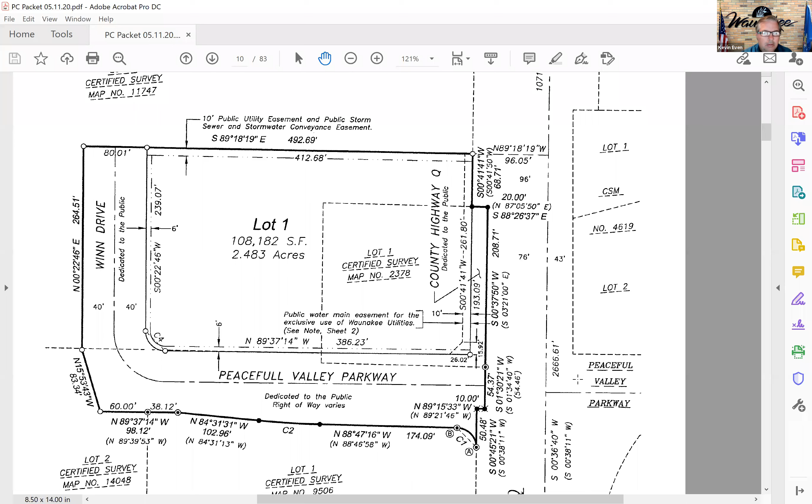So with that, Chris, I would recommend that you hold the public hearing.

Okay, then I'm going to open up the public hearing. If you would like to make a comment on this, please raise your hand and Tracy or Todd will pull you in. So there are two attendees participating. Bottom of the screen is an attendee. You have a raise hand button. If you care to participate, click that now.

I see a panelist with a hand raised. Looks like that's the applicant, Mike Lawton. But I don't see anybody as an attendee with a hand raised, Chris. Okay, raise your hand now or forever hold your peace. Well, I think Mike probably wants to talk as part of the public hearing. Okay, let's pull Mike in then. He's already in. Go ahead, Mike. You just have to unmute.

Unmute. All right, can you hear me now? Yes. Okay, I sound like that soap commercial.

A couple things. Brad Fry is on here from Kwik Trip, so he may want to comment on some aspects of this. And Don, I think I saw him on the list of participants, so he may want to comment as well. The one thing I wanted to comment on was the covenants.

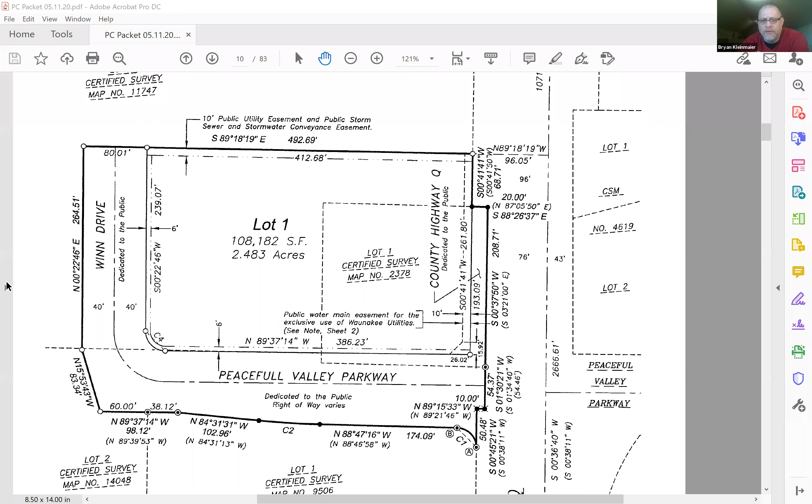Bryan explained that per page 5 of the packet, there are two separate recommended motions: one for the certified survey map, and one for the rezoning. There's no concern with the certified survey map comments from the public hearing, so that motion can be made as written. For the rezoning, if the requested condition should be added, it would read: subject to final review and approval by the village engineer and village attorney.

I'll make the first motion to recommend to the village board and joint plan commission that it approve the certified survey map, subject to final review and approval of the village engineer and incorporation of all village staff comments.

Do we have a second? Brad Zeman seconds. Does anyone want to make a comment? If so, please raise your hand. Otherwise, roll call vote, Tracy.

Chris Zellner, yes. Phil Willems, yes. Kristen Runge, yes. Brad Zeman, yes. Brian Malish, yes. Chris Thomas, yes.

Brian Wallace, yes. Okay, then do we have a motion for the second motion?

Please read it from page 5, the second motion, as Bryan indicated. I'll make a motion to recommend to the village board and joint plan commission that it rezone the lot to be purchased by Kwik Trip from A1 Agricultural Holding District to the C1 General Commercial District, with the attached deed restrictions to be recorded on the lot.

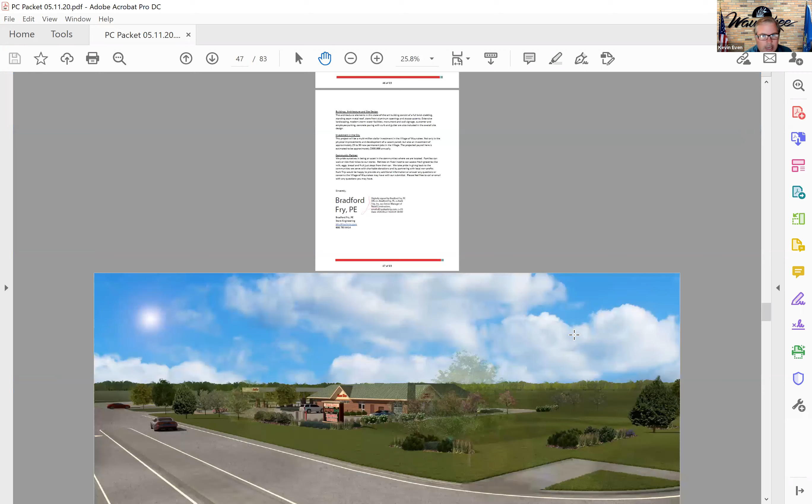I can start and Bryan can add in. This is the site plan approval, and Tracy will bring it up on the shared screen. Don Tierney wanted to add a couple of comments, and we should ask the applicant if they're interested in making a presentation regarding the proposed site plan. We have comments on issues worked out regarding the building's architecture, as well as some trail improvements to discuss. Chris, I think our first question is to ask if the applicant, Don or the folks from Kwik Trip, are interested in making opening remarks.

Okay, let's start with Don. Don, do you have any opening remarks you'd like to make? Yes, I do. Can you hear me? Yes. I'll tell you one thing, if I didn't have Jerry running this phone, I'd be in big trouble.

Is there any way, Kevin, you could put up those pictures I sent you of the shelters? That's the reason we wanted that flat roof on the canopy. We plan on having a beautiful park that overlooks this.

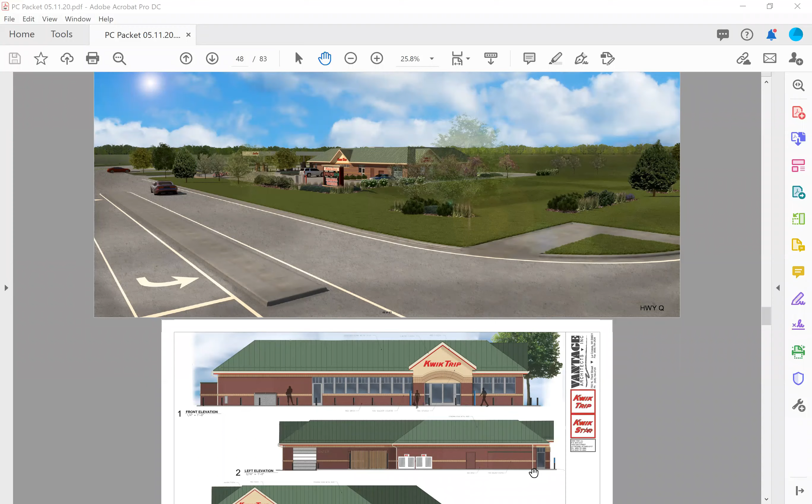Got it. Chris, I'm just wondering, just for flow of... okay, forget it. Go ahead. Yes, it's up.

Okay, what you're looking at is a picture of a pair of trusses being built in my shop. They're small; one is for the pickleball court in Kilkenny, and the other is for the beautiful West Bridge in Central Park. This is the same look we want overlooking the background of the Kwik Trip, and that's why we really appreciate being able to go with a flat canopy, because at a distance, that is what we want to look at. The other thing, on the north-south road, that would be the road on the westerly part of the site plan.

That will head straight north, and we really would have had to only put a 70-foot right-of-way. As we went, I wanted to go with 80, so we could have a beautiful walkway with terrace trees, so the kids coming across and down Woodland Drive could walk up a beautiful walkway.

And come up that walkway, and that would be their way to the park. As we plan the rest of this community, we'd have a walkway on the central spine that eventually would head west. I don't know, Kevin, could you bring that picture up?

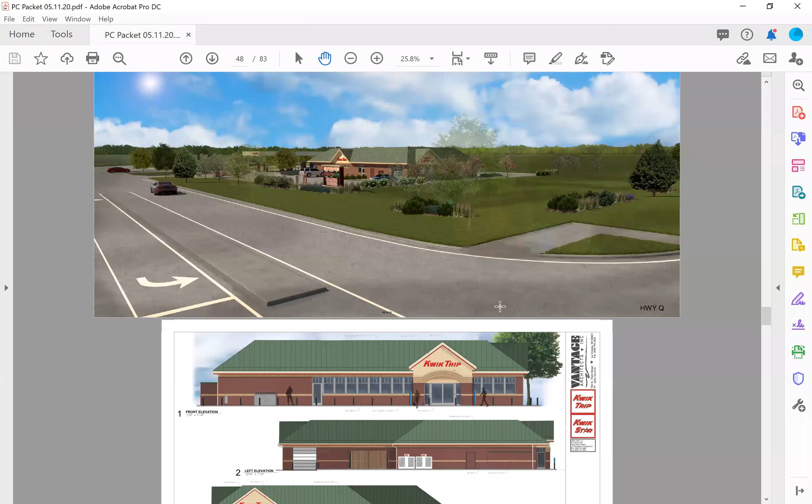Yes, this is Brad Fry with Kwik Trip. Again, I thank the village staff for the time we spent in March and April working through a couple of issues we had to improve landscaping layout and circulation through the site with driveway improvement, working hard to make this a special building and architectural plan for the village of Waunakee.

As you can see, this is looking northwesterly from the intersection. Some of the landscaping trees have been lightened in color to see more of the building features. The canopy here, like Don mentioned, is a flat roof canopy. We did a 9-foot brick and a tan colored fascia.

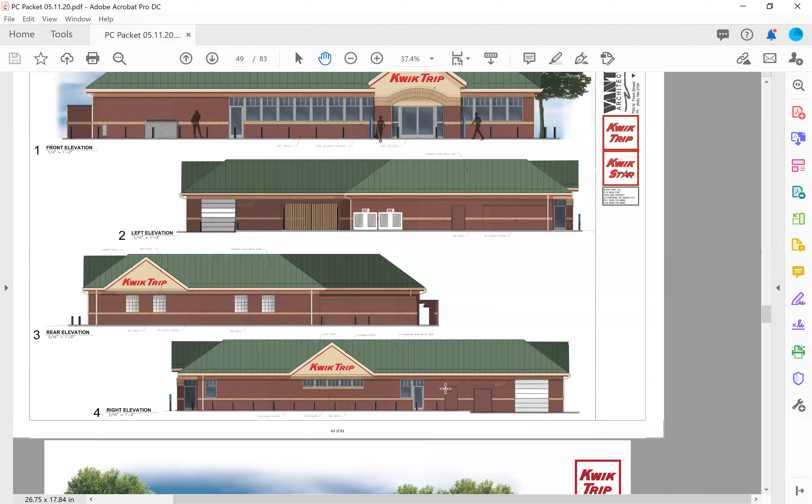We did remove our stripe that goes through the canopy, again just to not raise as much attention to the canopy as we typically do.

And then again, this still stays with our overall franchise colors and franchise look on the building, with the 2-tone brick, the green hip roof, and the tan fascia and gutter line. And that's all I would have for comment.

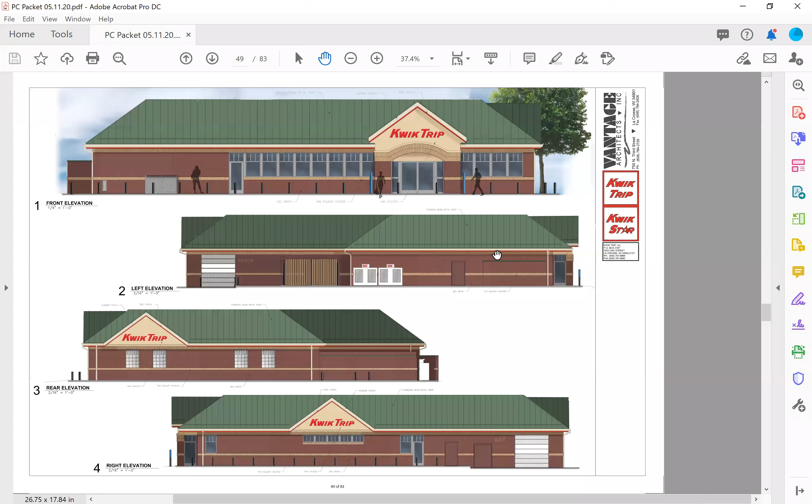Chris, just adding a couple comments at the staff level, and I'll ask Jason if he wants to add more. I think when we worked through the architectural control, a couple things we thought were important was because the fueling station is...

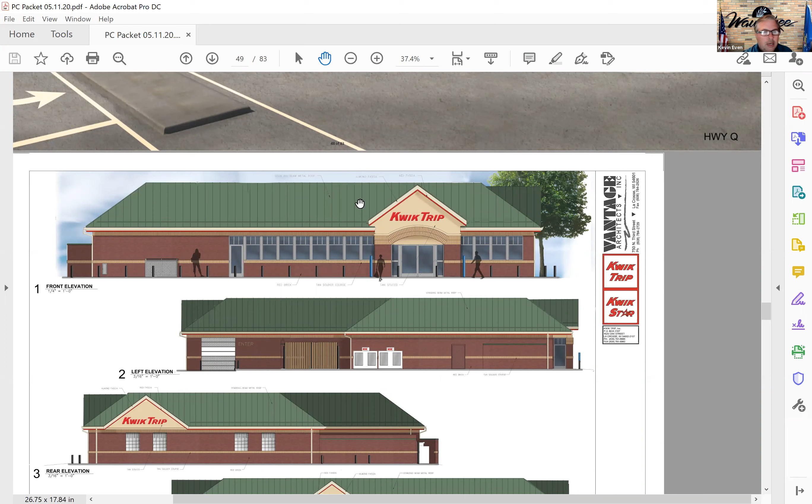Tracy, if we can just scroll back to the 3D, or maybe you're letting me. Are you doing it, Tracy? Sliding down? There it is. Oh, too far. All right, let me try this again.

So what we thought was important is that the fueling station is on the back side of the building, on the opposite side of County Trunk Q, so it's not really a focal point.

Really, the focal point is the building, which has the green hipped roof, which we think is consistent with what happened on the other Kwik Trip on the other side of the street. And the canopy is really behind it, so it's being blocked by the building.

The other thing we asked for was to change the tone of the canopy so it blended in better, taking out that red stripe that Brad highlighted. So we felt with those changes and adding the brick that this was an acceptable, really a high standard convenience store that'll fit in well along this corridor.

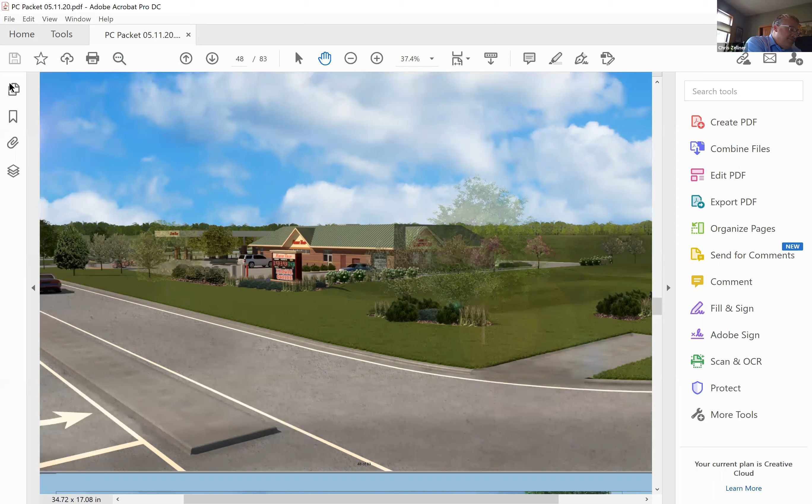You have comments if you don't have questions? Well, I'm still wrestling with the canopy cover. I don't really like it. I don't like the inconsistency. Now we're looking at the third Kwik Trip in town. Two of them have the same canopy structure, one that we kind of lobbied for, in fact, on location number 2, and now location 3, it's out, and we're back to a flat canopy. I heard the rationale behind it, but I'm still just trying to decide if I like it or not. Not really a question, just internal wrestling.

Okay, Brian Wallace. I would echo Brian's sentiment about having 2 Kwik Trips on that corridor, and Kevin alluded to it a little bit as far as making sure they're consistent in appearance. I would suggest that both of these be in the same manner as they come into town.

Chris Thomas: There was talk of a pedestrian walkway, like a trail, but what are the plans right now for pedestrian access and bicycle access to this location? Kevin, do you want to take that? Yeah, Tracy, if you could go to page 21 of 83.

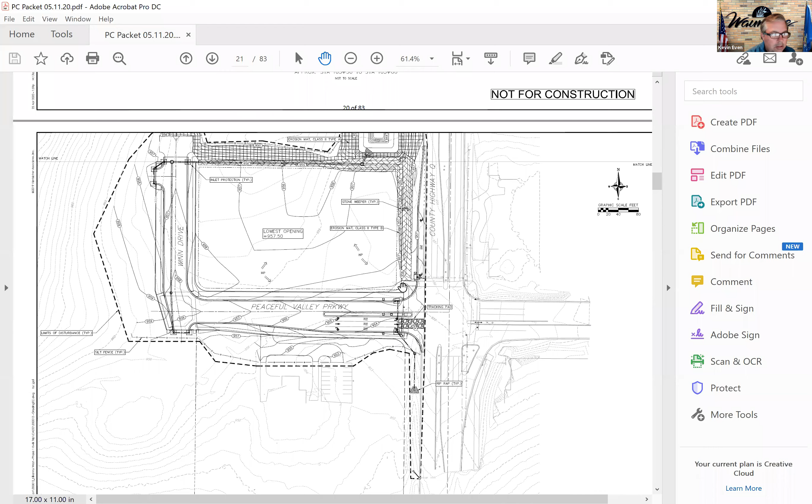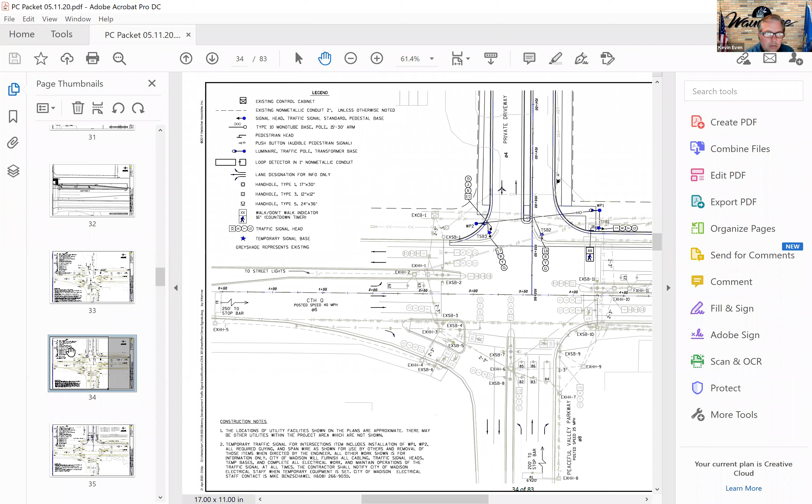Truck access would come off of Peaceful Valley Parkway. And if you go to the site plan, it'll show the revised access to the site, which accommodates the trucks. In fact, we might have a site plan that shows the truck turning movements - I don't see if I can find it within the packet. But to answer your question, trucks were analyzed to make sure they could safely get in and out of the site without blocking the intersections or the roadway, so they'd be able to smoothly turn in and out without having to stop or wait for vehicles to turn.

This is Brad with Kwik Trip. It is our SP 1.0, which shows how truck movements would come into the site for both grocery and fuel trucks. It's 61 of 83.

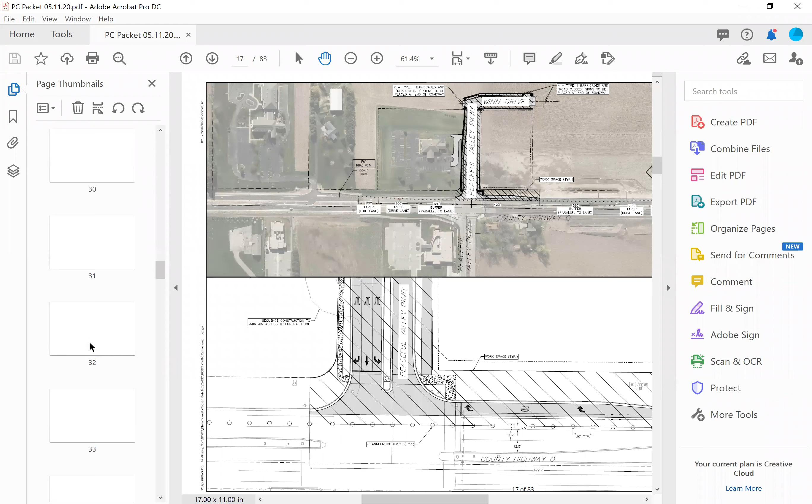Chris, does that answer your question? It does, thank you. I guess my last comment is, to follow the same sentiment that both Brians had mentioned, but the canopy - I'd also like to ask, are there any other differences between the two stores aesthetically besides the canopy?

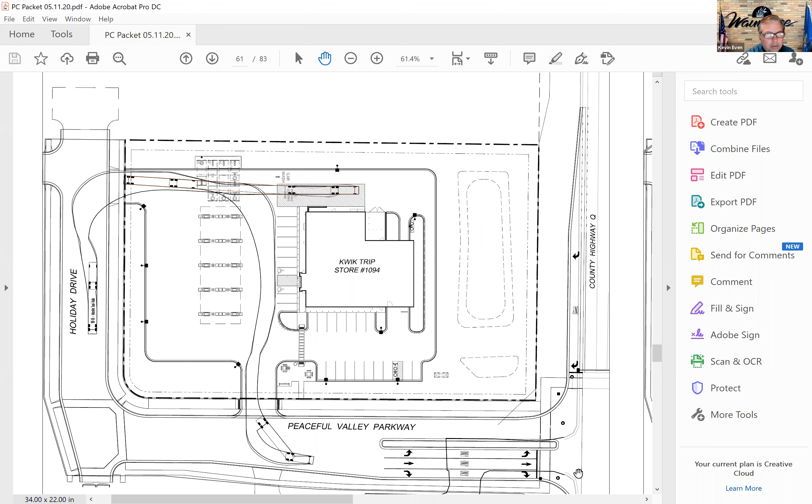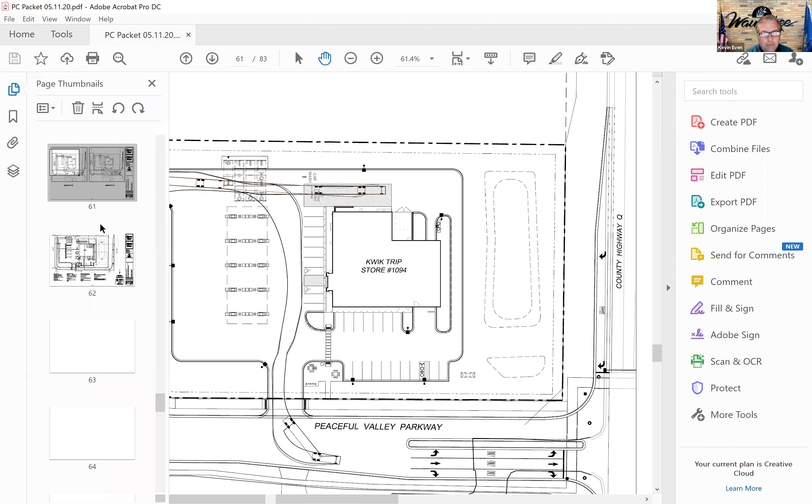Yes, so the main difference is the canopy, but I think as important is that the configuration of the store is flipped. What was important at the staff level with the other one having the hip roof was because the fueling station was really out in front of the building - that's what you see as you come into town. In this case, the fueling station and canopy is behind the store, so what you see as you drive into town is the structure itself.

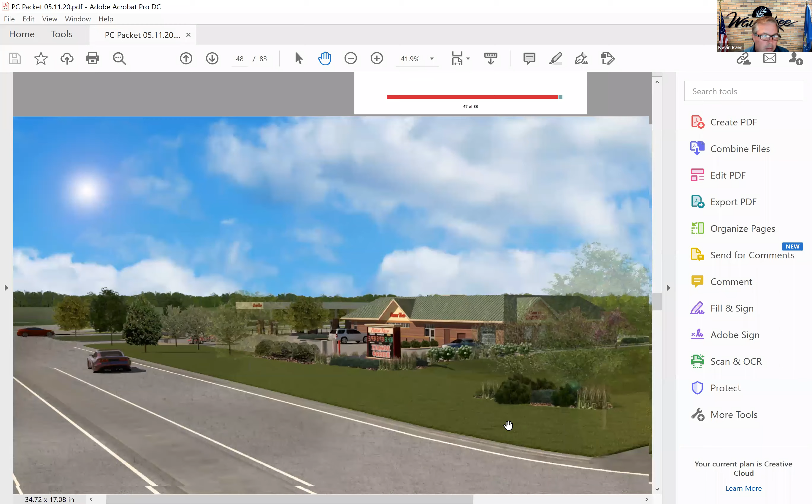What else is different is that the bricks on the columns for the canopy are different. We didn't want to overwhelm the canopy with what's being proposed - we think the bricks going up more than halfway is appropriate.

And then lastly, the change is - you may remember this - as part of the building we had some upgraded brick materials that really match that east side of the road. The Animart and some other structures out there, and Boston's, have this field stone look, which was an integral part of the Kwik Trip on the east side of the road. This one on the west side of the road is the standard red brick, consistent for the whole building.

Okay, thank you, only questions I have. So I don't really have any other questions other than what's been brought up.

I'll just say from the canopy perspective, it's a little different situation in that this is not in that corridor we talked about with the other Kwik Trip, nor Main Street. And the fact that it's on the back side, I don't have as big of an issue with it. I also think the tone of the color matching the building keeps it very calm within the whole look. If it were bright, with gas up on top with bright neons, white with stripes going through it, I think that would be a worse look.

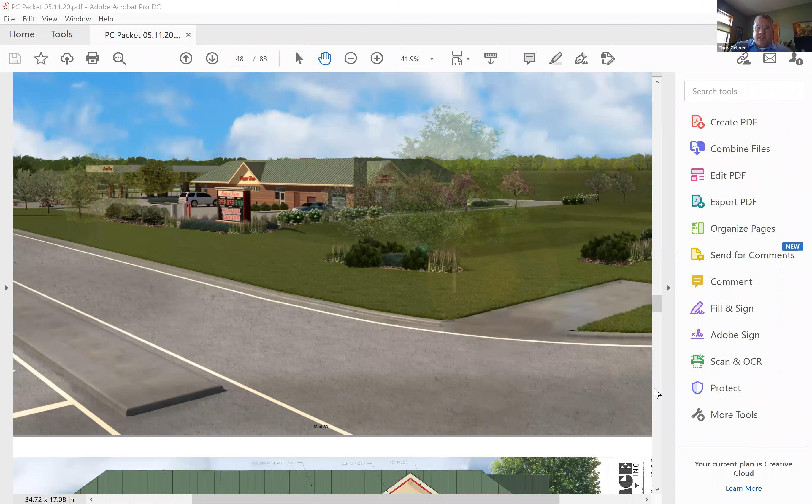I don't think it makes sense in the beginning, unless Don or one of you can answer, how are pedestrians going to get here right off the bat? Are all the roads going to be in from all different sides right from the beginning? And is that trail you're talking about that's going to go through the whole area going to be in there right from the get-go? Those are my only questions.

Do you want me to say something, Chris? Yeah, just as far as the trails go, how pedestrians are going to have access to the building right now on that side without the other structure in. That's a great question.

One thing that's a little confusing looking at the rendering of Kwik Trip, the 3D, is that it's on the plan that when Peaceful Valley is extended, there's a 10-foot trail. It doesn't show it on the 3D, but if you look at the actual plan, it's there. So the trail that comes up from Kilkenny, we extend Kilkenny west, you'd push the button and, kind of where that old house is, you'd cross and be on a 10-foot trail. You'd walk on the north side of the extended Peaceful Valley, and when you get to that intersection, we put a beautiful entrance in with a set of arches, Kilkenny Farms, and that trail would wind through that beautiful park we're planning.

And getting back to the canopy, there's a huge elevation change, and that's why this really cool shelter would be what you're looking at.

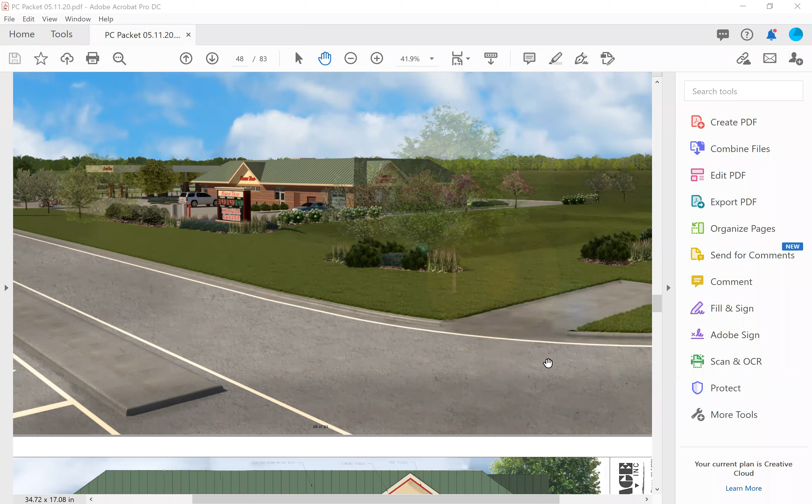So if you're in Kilkenny Farms, or if you were down at Boston or Animart, you'd come up the trail, push the button, and cross. It's the 10-foot trail, today on the north side of Peaceful Valley. It will continue on the north side, right along Kwik Trip. When it gets to the far west, where Kwik Trip is and what we call Winn Drive, you cross the street and walk into a beautiful park.

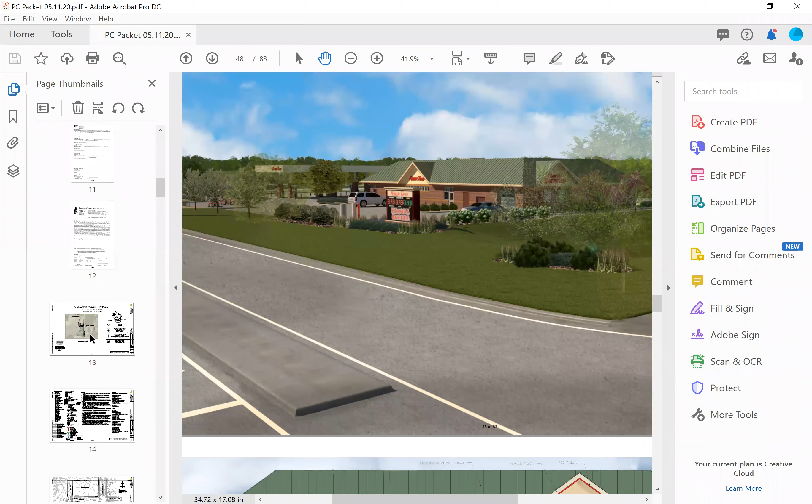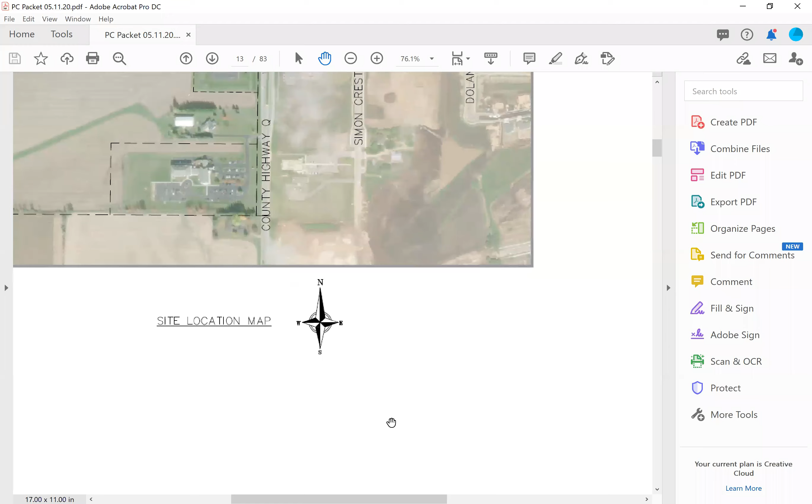If anyone there has been to Monadon Park, you'll see that trail on top of the hill. It goes through the park and then actually goes to the school. That's why it's going to have a nice flow, because you can go from anywhere and you'll always go into the park, winding through this beautiful park. You'll be elevated - I don't know the exact footage - but with the flat canopy you will see those trusses we're building. That's just a little pickleball court truss; the one in our central park will be huge, a showcase for the entire village.

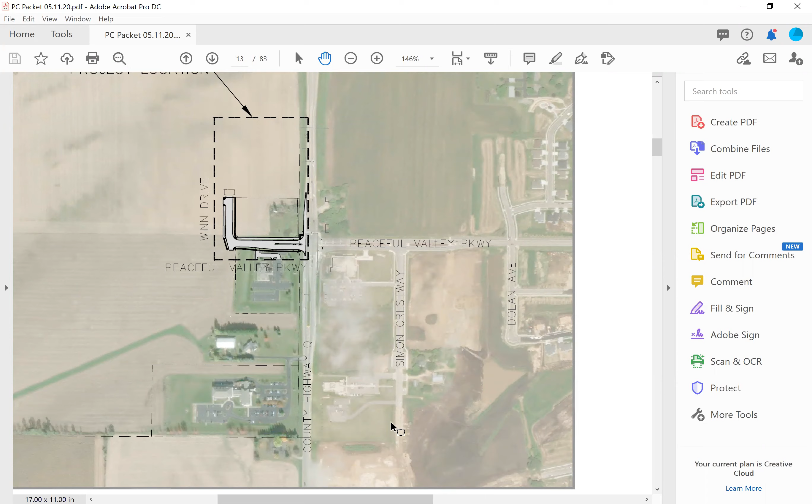And then you'd walk through that, and on the west side of what we call Winn Drive there'd be the 10-foot trail that goes out to Woodland and hooks up with the 10-foot trail that goes to the intermediate school. The backbone, as you walk through this beautiful park, you'll see that shelter on top of the hill, and eventually that'll wind its way back to the intermediate school, with a lot of the same feel we put in the Monadon addition to Savannah Village.

So maybe I didn't ask my question properly, Don. When will the pedestrian trailways be in so people can get to this Kwik Trip? It will be put in when we put in the extension of Peaceful Valley. That trail, if you look at the engineering drawing, is there - it doesn't show on the 3D, but that 10-foot wide trail is part of extending Peaceful Valley. So that would be put in ASAP.

So what I'm getting at is from Woodland Drive, that area of town to the north, how are they going to access this by pedestrian? That's why we went with what we call Winn Drive, the north-south road. We would build it out as far as Kwik Trip, because I don't want to hastily plan the rest of it. We have the great concept, but when that is extended, we would build it as far as the Kwik Trip CSM, and then it would continue in our first phase of Kilkenny Farms.

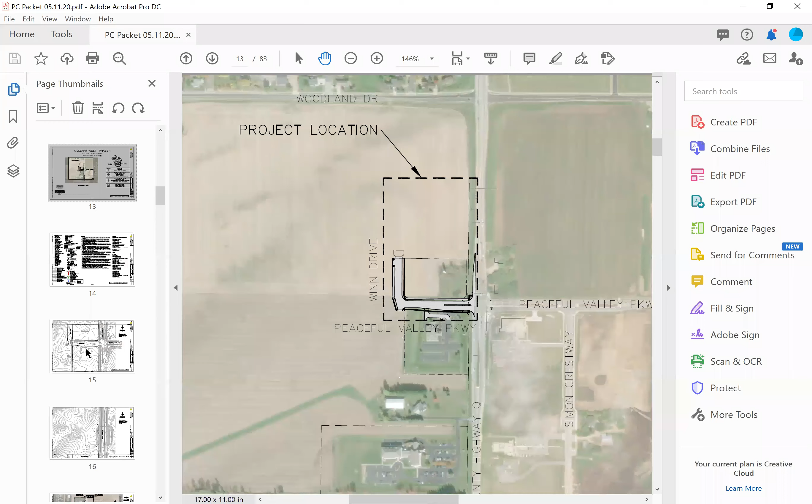It would be built out with the first phase, and it would go straight north and hit the trail on Woodland Drive. But for now, there's a beautiful trail there already on the east side of Highway Q. So the people can take that trail, push the button, and go to the extension on Peaceful Valley, and anybody could walk to the Kwik Trip store. I'd prefer people not have to cross Highway Q twice to get down there from a pedestrian standpoint, so the sooner we get to that, the better with the trail. So those are my only comments.

Staff members, any comments further from the discussion we've had? Brian Kleinmeyer, any comments?

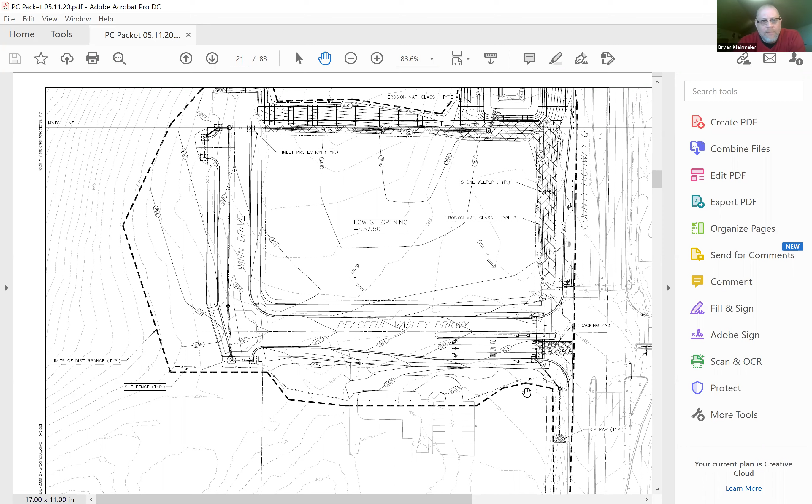I would just note that if you want to make that addition to the second motion, the motions are on page 39 of your packet. We have two separate motions, one related to the site plan, one related to the conditional use permit. I think it was the motion on the conditional use permit that Mike was asking to add the phrase subject to final review and approval by the village engineer and village attorney. I'd point out that the conditional use permit, if you were to recommend its approval, is the one I emailed to folks today. It takes the same form as a lot of the written conditional use permits we've approved in the past. This one would allow the applicant to construct and operate a convenience store on the property, including car washes, fueling stations for gasoline, diesel, ethanol, or alternative fuels, and outdoor display and sale of merchandise approved by the village engineer.

Any other staff comments? This is Jason. I didn't see my memo in the packet, so I want to be sure others were aware of my recommendation that the issue of the exterior lighting under the canopy be addressed in the CUP, that it be no greater than lighting for other canopies in the village.

Okay. I'll make the motion to recommend to the Joint Plan Commission that it approve the site plan, subject to final review and approval by the village engineer, incorporation of all village staff comments, and conditioned upon village board approval of the associated certified survey map, rezoning request, and deed restriction.